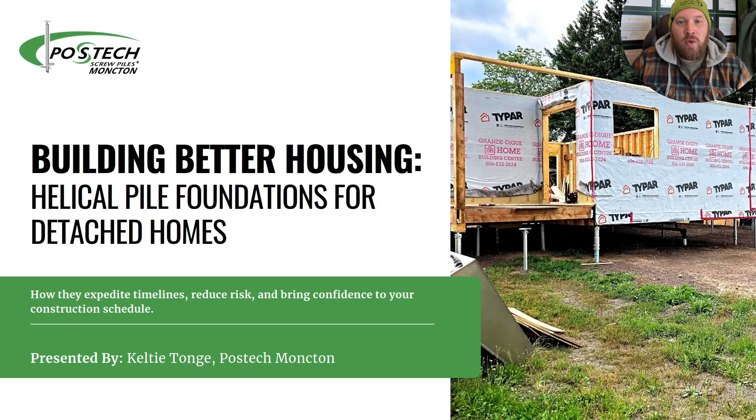My name is Keltie, and I am the sales guy here at Postech Moncton. We'll dive into things right away, but for those who may not be familiar with us, I wanted to give a quick introduction to our company. Postech Moncton is one of the largest installers of helical piles in the region, serving Moncton and area for over 14 years. Our team has supported countless projects ranging from residential to light commercial, located in all sorts of ground conditions, including providing helical pile foundations for modular, mini, and site-built homes. We have the capability to handle the design, engineering, and installation of helical pile foundations, which gives us a unique perspective on both the technology and the industry at large.

Since we've been seeing an increased interest in using helical piles for housing applications, we wanted to create this presentation to shine a light on this interesting use case.

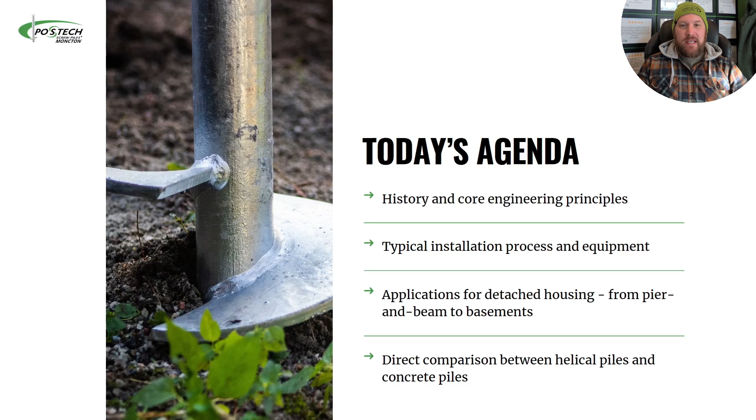If you're not familiar with helical piles, it's easy to think that they're a relatively modern innovation in the foundation space. In reality, they were first invented in the 1830s by an Irish civil engineer named Alexander Mitchell. For decades, they were used to support lighthouses, bridges, and waterfront piers in sandy and unstable soils. Of course, over the past two centuries, helical piles have seen extensive innovation and evolution, but the core principle and design has remained the same. What used to be a solution for difficult marine environments has become a widely used and reliable deep foundation system for residential, commercial, and industrial projects across the globe.

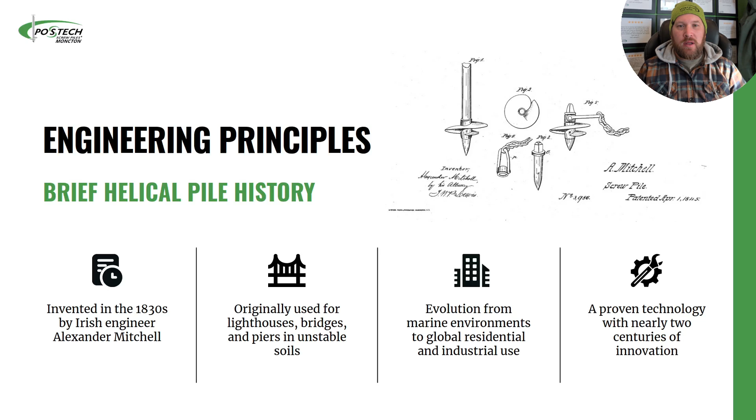So how does a helical pile actually work? Let's break it down. A helical pile has 3 main components: a central steel shaft, one or more helix plates, and a pile cap that connects the pile to the structure. Broadly speaking, here's the primary function of each of those components. The steel shaft transfers loads down into the helix plate. The helix plate both helps the pile advance into the ground and anchors the pile in the soil. The pile cap transitions from the helical foundation to your structure.

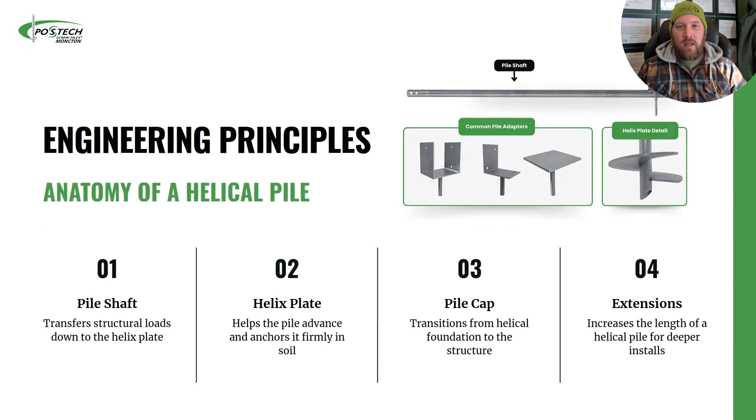Let's take a closer look at the helix plate, which is really the defining feature of a helical pile. The helix plate is manufactured by stamping donut-shaped blanks from a sheet of steel. It's then pressed into the specific helical shape. This is an important step, as the helix plate must have a specific geometry and pitch in order to create a helical pile. The shape of a helix plate enables it to cut through the soil as it advances down.

This makes helical piles a type of displacement foundation. Instead of removing and replacing material, they simply push it out of the way. That eliminates the need for excavation or dealing with soil spoils. It's the pressure of the surrounding soil pushing on the top and bottom of the helix plate that enables the pile to anchor firmly in the ground. Plus, because the helix plate is comparatively wider than the pile shaft, a helical pile foundation is extremely resistant to frost and soil movement. There's a lot we could say about the technical aspects of helical performance, but in the interest of time, we'll move on to looking at the installation process.

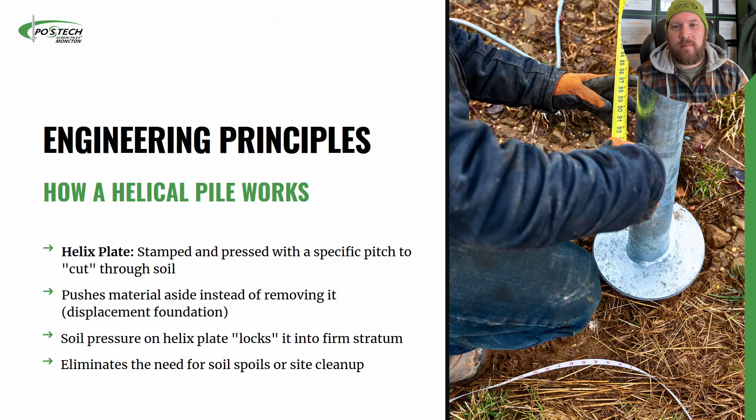Based on how a helical pile works, you're probably already getting an idea of what the installation process looks like. It starts with the equipment, and there's a wide variety of machines that can be used to put helical piles in the ground. This ranges from simple handheld devices all the way up to custom-built machines. But generally speaking, the most common solution is to use a compact excavator.

They deliver great hydraulic power, are maneuverable, and can use their arm to reach all sorts of areas. The second piece of equipment required is something called a helical anchor drive. It's a hydraulic gear motor that delivers high torque and low speeds to rotate the piles through the ground.

And really, that's pretty much all that's required to install a helical foundation. Compared to other foundation options, this minimal equipment is one of the reasons our customers like using helical piles. It's quite a bit easier and faster in terms of mobilization, and it causes no impact to the job site.

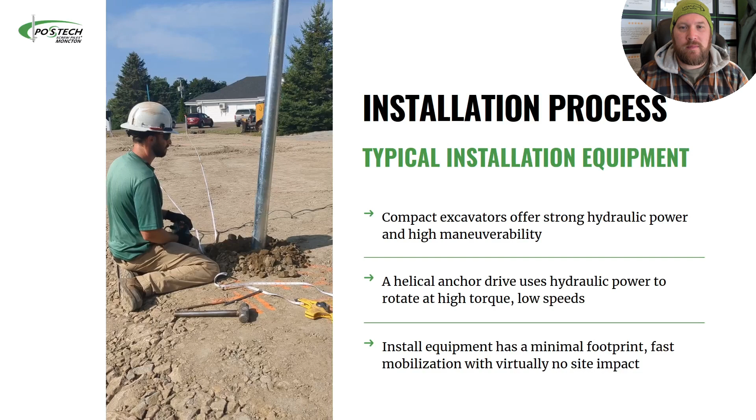Now, this next point is a really big one and a significant benefit of using helical piles. Like I mentioned earlier, the soil will exert pressure on a helical pile as it's installed. Firmer soil exerts more pressure, looser soil exerts less pressure. We can read this soil pressure in terms of the torque being applied on the pile during installation. By reading this torque, we're able to do something very powerful: predict the ultimate pile load capacity.

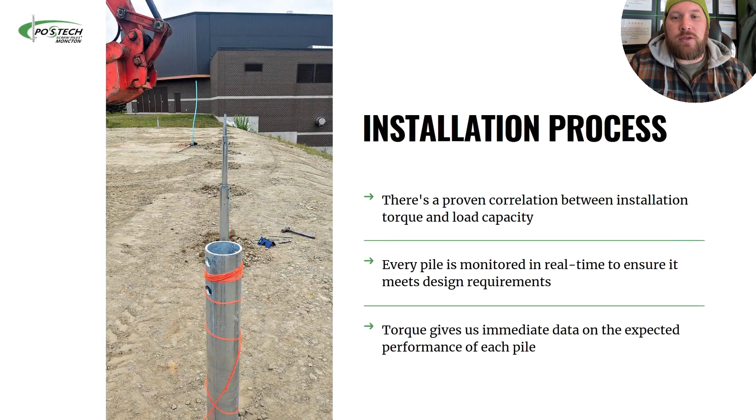Researchers and scientists first discovered in the 1970s that there's a correlation between the amount of torque applied to a helical pile and how much load capacity that pile will deliver. This has been extensively studied and proven many times in the decades since. That gives us, the installer, real-time insights into expected performance every single pile we put in the ground. We calculate the torque each pile will need to achieve during the design process, and then use those figures to judge when the foundation has been installed correctly.

Now, in terms of actually installing a helical pile, it's a very straightforward process. First, we check to ensure pile locations are clearly marked, then we attach the lead section to the anchor drive and begin rotating it into the ground. A typical lead section is usually 7 to 10 feet in length. If the pile needs to go deeper, we'll attach extensions and continue advancing it. When the pile has reached proper embedment, we move on to the next one.

After the piles are installed, we trim them to the correct elevation and attach the pile caps. You're now ready to build or set a home on the foundation. No cure time is required. Plus, because we don't have to perform excavation to install a helical pile, it eliminates soil spoils or site disturbance.

After the install is done, we can also provide a piling report that indicates the final depth and torque for each pile. And really, that's all it takes to put a helical pile foundation in the ground. It's a quick, clean, and straightforward process.

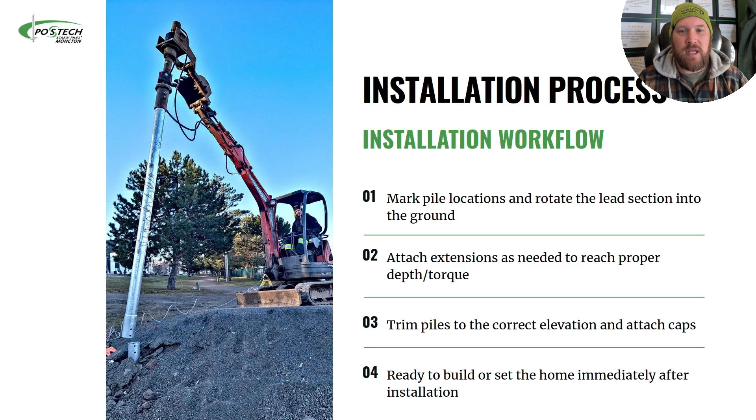Now that you have an idea of how helical piles work, let's get into the core of our topic today. How can you use this foundation solution for the homes you build? As you might have already guessed, helical piles are highly versatile and readily adapt to all types of foundation configurations. What I want to do is take a look at the most common designs: pier and beam, crawl space, basements, ICF, and concrete slabs, so you have an idea of how helical piles could apply to your projects.

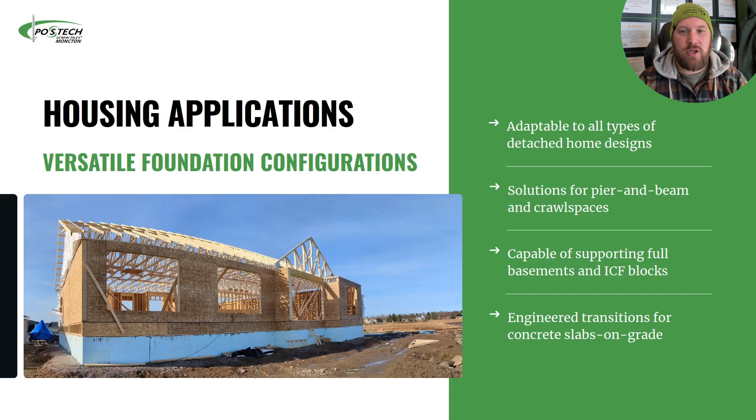First up, let's take a look at pier and beam foundations. In this configuration, the helical piles are acting as the engineered piers to support the beams. After installing the piles to the correct depth and torque, they're connected directly to the beam, either with a bracket or flat plate. We have concrete pile adapters, which can transition to a poured concrete beam as well. Our team used this approach when installing helical piles to support concrete beams for a Jiffy Lube garage.

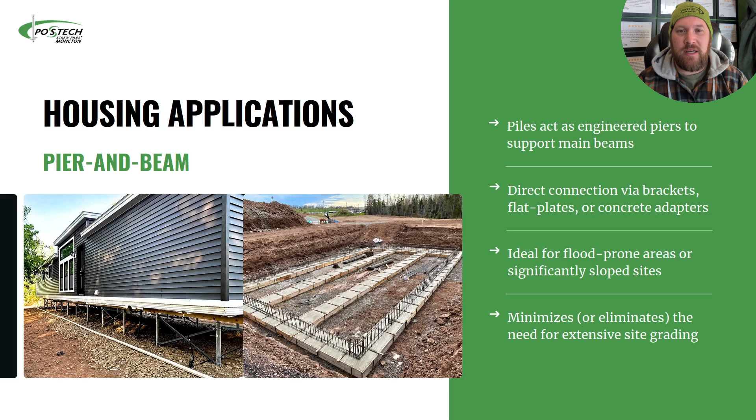Pier and beam can be a good approach for homes that are being built in a flood-prone area, as they can elevate the structure. Also useful for sloped sites where you want to eliminate or at least minimize the need for excavation and grading. Next, let's take a look at crawl spaces.

We can use helical piles to support a variety of crawl space types, from poured concrete to ICF blocks. They eliminate the need for a frost wall and footer, as the piles will transfer structural loads deep into supportive soil to prevent frost heave. This saves you time, site prep, excavation, and waiting for curing. Another thing to keep in mind is that if you're building in an area with soils prone to shrinking and swelling, helical piles will resist that ground movement. This ensures solid foundation performance over the long term with no sinking or shifting.

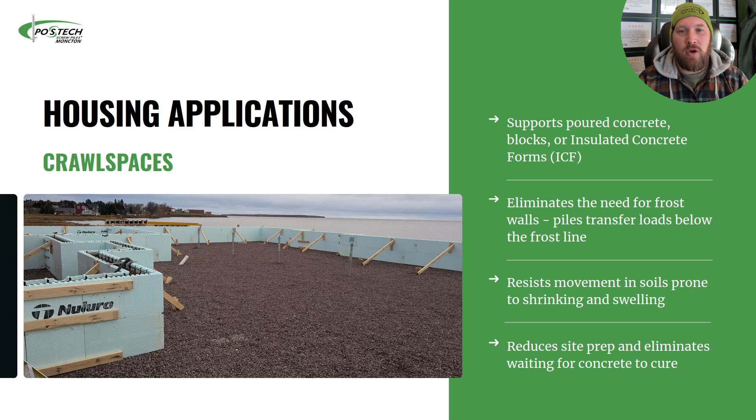Alright, pier and beam or crawl spaces are fine, but what if you're planning a full basement under the home? Whether it's going to be precast, poured on site, or insulated concrete forms, helical piles can support it. Now, one of the common concerns we hear when talking about using helical piles to support a full basement is the weight. Concrete is heavy. Plus, you have the rest of the home's structural load to consider.

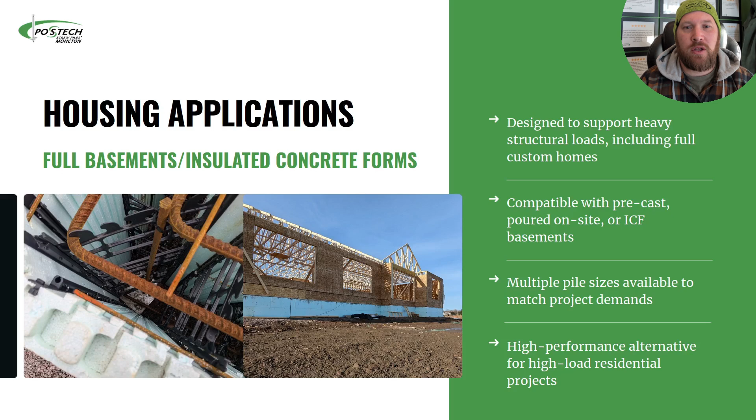Can helical piles really handle a demanding project like that? The answer is yes. Helical piles are capable of supporting significant loads. It all comes down to choosing the right pile size for your structure. At Postech Moncton, we have a range of helical pile sizes to suit all kinds of loads, including heavy structures, like full custom homes.

Okay, for the last one here, let's talk about concrete slabs. Going with a slab on grade is a common option for homes in our region, but damage from frost heave is always a concern. The usual approach is to include a frost wall and footer, but helical piles offer an easy alternative.

As I mentioned earlier, we have pile caps designed to transition to poured concrete. They have vertical studs that lock into the slab after it's poured, transferring the structural loads down to the soil.

First, we install a grid of helical piles across the footprint of your slab. Then you can install rebar or mesh for reinforcement and tie those into the pile caps. After that, you simply pour your slab on top. This results in a slab that's supported by helical piles, not the ground. For projects on problematic soils or where slab movement cannot be tolerated, this is a great solution.

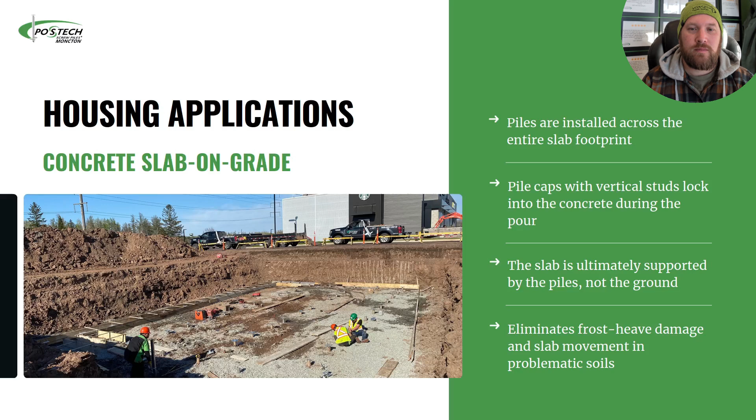So, how does all of this stack up against traditional poured concrete piles? I think the best way to frame this is from a project management perspective, because this is where the differences really impact your bottom line.

Schedule: depending on your project, a helical pile foundation can be installed and ready in a single day. There's no cure time required, and you can start building immediately. Concrete, on the other hand, is at least a 3 to 7 day process. You have to excavate, build forms, pour, then wait for it to cure. If you run into unexpected soil conditions or bad weather, you'll likely face delays.

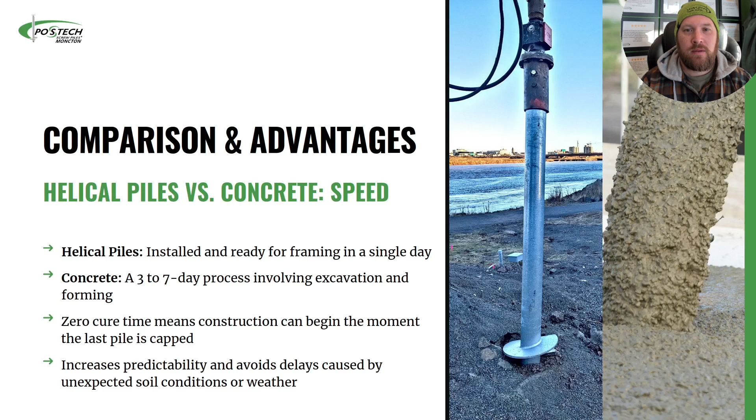Weather: speaking of weather, we can install helical piles in a wide range of conditions - rain, snow, cold, or mud. We'll still be able to put your foundation in the ground. Concrete is temperature and moisture sensitive, meaning a rainy day can halt your progress on your build.

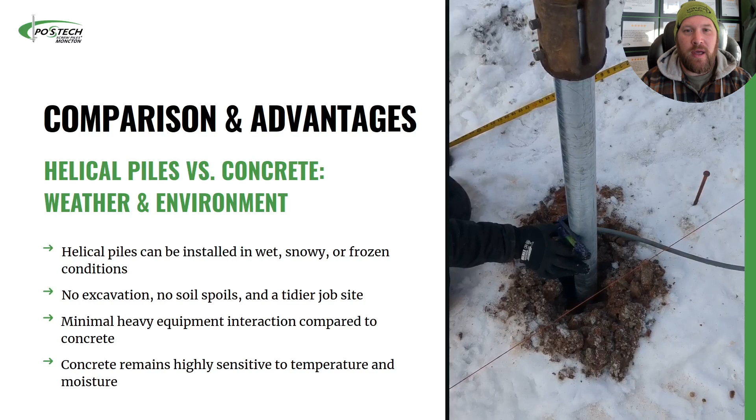Site impact: there's no excavation required to install a helical pile. That means you won't have added spoils to manage, plus it keeps your job site tidier while greatly reducing site prep work. Concrete, on the other hand, means excavation, spoils, and heavy equipment.

Verification: we monitor the torque on every pile that we install. Why does that matter? Thanks to an empirical relationship between torque and pile capacity, we can use that to verify pile performance in real time. This also allows us to rapidly respond to surprises in the soil.

For example, let's say a geotech report indicated competent soil at 20 feet, but it missed the fact that competent soils in some locations weren't found until 35 feet. With helical piles, we'll know immediately that we're not getting torque at 20 feet. To fix, we simply add pile extensions until reaching the required torque.

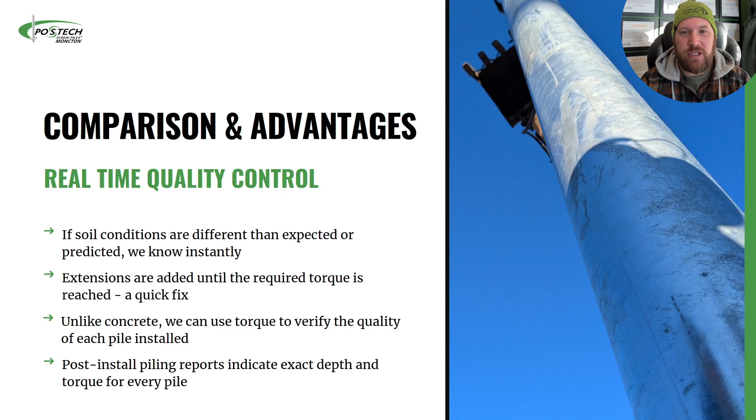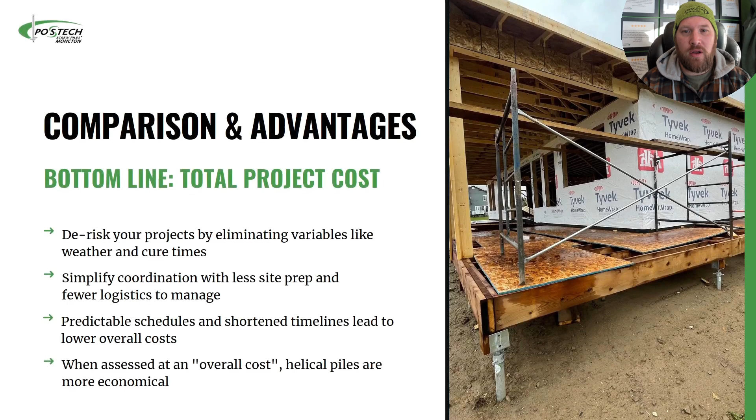Total project costs - this is the big one. If you compare helical piles and concrete on a strictly cost materials basis, you might think helicals are more expensive. However, our clients find their total project cost is almost always lower with helical piles. Why? Because you can eliminate risk variables like weather delays, concrete cure times, extensive site prep, and unexpected soil conditions. You're effectively de-risking the project during a critical phase and ensuring predictability in your schedule.

Okay, we've gone through a lot of information today, so let's recap. What are the key benefits of bringing helical piles into your next home build? First, you get speed and predictability, allowing you to shorten your foundation schedule and get to framing faster.

Second, you get engineered confidence, knowing you're building on a foundation with a known and verified capacity. Third, you get lasting performance, preventing long-term settlement issues that can lead to callbacks and a hit on your reputation. And finally, you get simplified projects with less excavation, less coordination, less logistics, and a cleaner, safer job site.